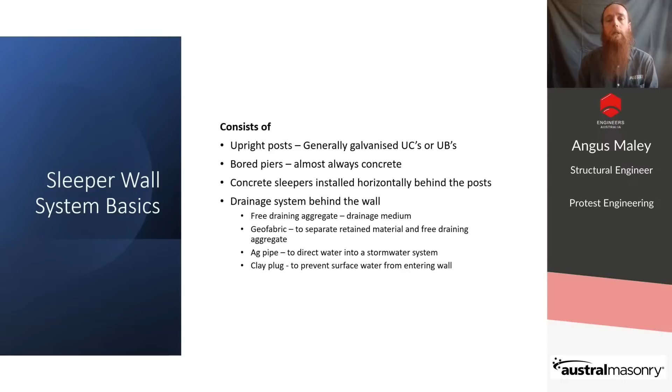Posts are generally installed at either 1.6 or 2 metre centres. Common post sizes used in the industry are 100 UC15, 150 UC23s, 150 UC30s, and 250 UB26s. Sleepers are generally 75 or 80mm thick and either 150 or 200mm in height. The system retains earth up to a height of around 3 metres quite efficiently. The system can be used to retain heights of a little over 4 metres, however expense and risk does go up.

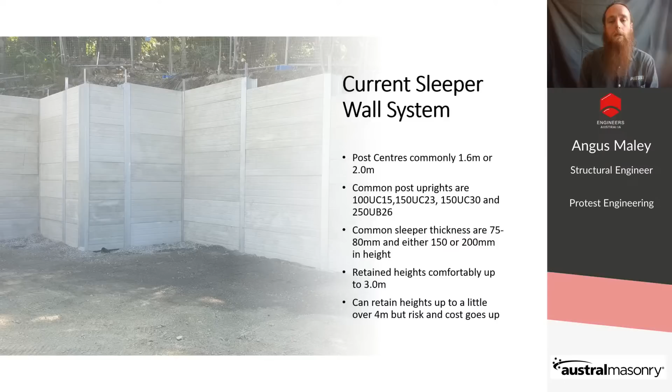I have been involved with construction of a sleeper wall up to a retained height of 6 metres in an industrial setting. However, the retained and founding material was extremely good and dead men were used to add additional resistance. Projects like that are not very common, and I would suggest the use of other wall types when retained heights in excess of 3.5 metres are required, unless there is some early contractor involvement at the conception of the project.

A basic history. Concrete sleeper walls gained traction in the civil sector in the 1990s, primarily in southeast Queensland, and started with precast concrete posts instead of the commonly used galvanised steel posts that are used today. These walls worked fine, however the concrete posts did create a larger footprint and also create some limitations to the system. I will elaborate more on these limitations later.

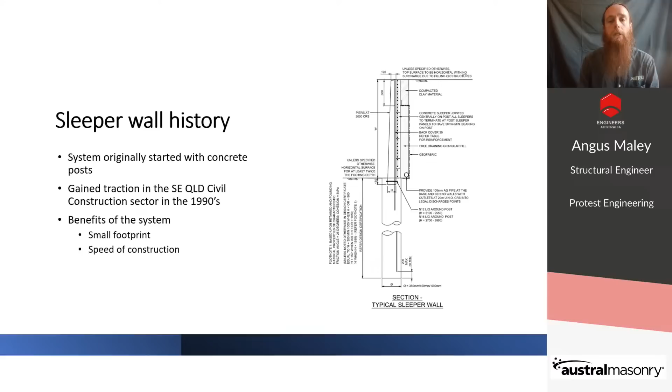The system gained popularity due to its small footprint, durability, and speed of installation. In the infancy of the system, these walls were primarily used to retain wall heights of up to 2 metres. The system works best when retaining and founding a stiff clay or better material, in cut, or if used in fill, where the embankment can be overfilled and cut back.

Advantages of concrete sleeper walls. Concrete sleeper walls have the smallest footprint out of all types of retaining walls, which is one of the driving factors as to why they have become so common in the civil and building industry. They are generally cost effective. Like most other retaining walls, as the retained heights increase, so do their costs. Boulder walls tend to be cheaper than sleeper walls, however more land is lost, so when space is at a premium, sleeper walls tend to be the preferred option.

Concrete sleeper walls are also a preferred choice due to their durability, especially when compared to a timber sleeper wall. A core fill blockwork wall, dry stack masonry wall, or even a boulder wall, however, will have greater design life provided they are maintained properly throughout their lifespan.

In terms of construction, they are much quicker when compared to a core fill blockwork wall. When compared to a dry stack masonry wall or a boulder wall, they are similar in terms of installation speed. They work best in either a cut environment or when a fill embankment can be overfilled and then cut back. This has made them popular with civil contractors as they can prepare the retaining wall work zones with their big machinery and then hand over to the sleeper wall contractor who completes the rest.

The speed of construction reduces the amount of time the cut embankment is left open, which reduces the risk of embankment failure and also means compaction is generally not required behind the wall. They are a low maintenance wall. Once they are installed, there isn't much to do in terms of maintenance, and due to the concrete face, there isn't anywhere for vermin to take up residence or spaces for weeds to grow out of the face, as is possible with crib walls or boulder walls.

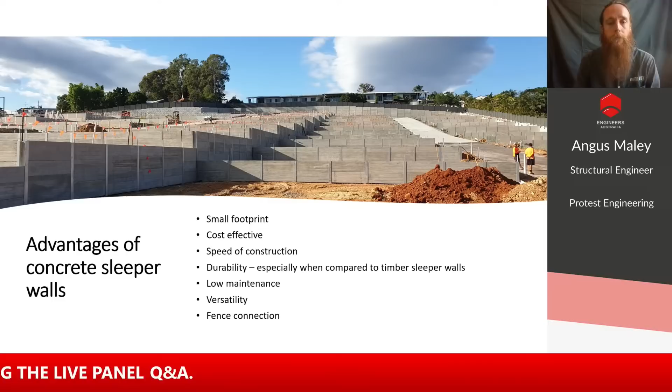Now that the system is using universal columns and beams as the upright posts, when there are higher loads above the wall due to either higher live loads or sloping grounds, it is just a matter of increasing the size of the UCs or UBs, increasing the bored pier diameter, decreasing the post spacing, and increasing the number or thickness of concrete sleepers. The ability to either bolt or have a fence connection welded onto the steel post is a huge advantage in terms of overall footprint and overall project cost.

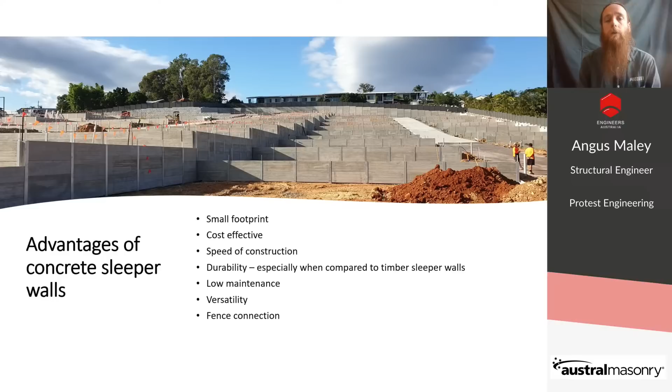The fence connection means the fencing contractor does not need to auger and install a fence footing. Before the fence connection came into the market, the options were fencing contractors would auger behind the finished wall, which ran the risk of compromising the geofabric that encapsulates the drainage aggregates, or void formers needing to be installed during the sleeper wall installation, which proved expensive and also relied on some degree of compaction around these void formers.

Cost savings. The sleeper wall market is extremely competitive, and there have been numerous attempts to reduce the cost of the overall delivery per square metre of wall. There are a few that have stuck and I believe work fine. There are also a number that, while still employed by certain designers and contractors, involve a degree of additional risk. All of the cost savings I will talk about involve some amount of additional risk to the end product delivered. I'm not saying these cost savings should not be used, however, the risk needs to be understood by all parties and managed accordingly.

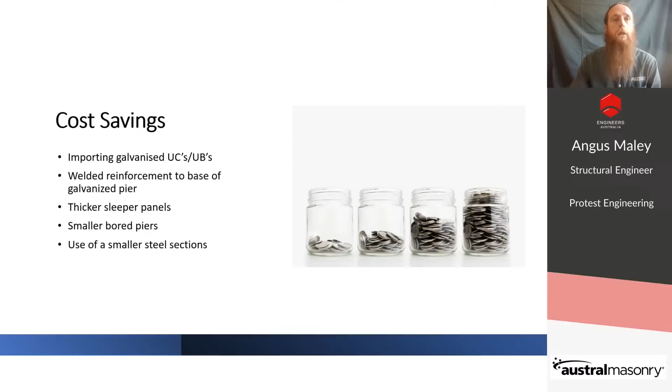The main cost savings are imported UCs or UBs, welded reinforcement to the base of the galvanised steel pier, thicker sleeper panels, smaller bored piers, or use of smaller steel sections. First on the cost saving list is importing of the galvanised steel UCs or UBs. Everyone in the market does this. The cost of the steel post represents a large proportion of the overall delivery cost, so you simply can't play in this market if you aren't importing steel posts.

Even if a concrete sleeper wall supplier was purchasing steel locally, a lot of this steel would have been imported anyway. Provided adequate QA has been conducted on the imported beams, this isn't an issue. Simply requesting mill and galvanising certificates from the importer is probably not enough. A rigorous QA system, including some third-party testing of beams after they have arrived in Australia on each delivery, should be occurring. I'm not confident this is happening industry-wide, however, this is based on my opinion only and can be taken however you want.

Welding of reinforcement to the base of UCs or UBs. This approach is commonly used by a lot of sleeper wall suppliers and installers. There are a handful of people in the industry who don't like this approach for various reasons. However, from my experience, I haven't had too many issues with walls designed and constructed this way. It is hard to estimate, but there must be well over 1 million square metres of wall installed with posts

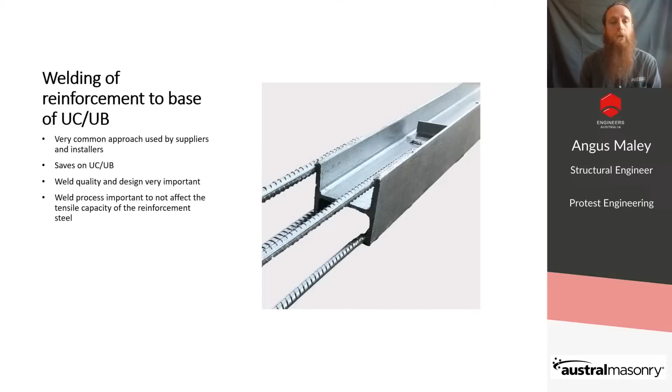using this base detail. Things to watch out for are the base connection design, the weld quality, and also the weld process. The welding process needs to ensure the bars aren't overheated. If this can't be controlled, the designer needs to design for reduced tensile capacity for the reinforcement.

Sleeper design. 75 or 80 millimetre thick sleepers are the common sleeper thicknesses provided by sleeper manufacturers. Cover varies from 25 to 30 millimetres and concrete strength varies from 40 to 50 MPa. All manufacturers cast their sleepers in steel forms and use intense compaction, so Table 4.10.3.3 in AS3600 can be used when calculating durability.

Any structural engineer familiar with concrete design will understand that these sleepers are extremely thin and also slender when spanning 2 metres. On paper, a sleeper that is 75 millimetres thick, cast with 40 MPa concrete and 2 N10s will actually have more capacity than the same sleeper cast with 2 N12s, because once N12s are used, it becomes over-reinforced and the code penalises the design.

In practice, the sleepers obviously aren't as strong. I believe this quirk in the code means there are certain manufacturers using this to provide a better sleeper design on paper, however one that will deflect more and is more susceptible to cracking. Another point to note is these sleepers are designed for where it will be installed long term.

The sleepers, however, need to be demolded after being cast, moved to the holding yard, loaded onto a truck via forklift, transported to site, unloaded on site, then moved around on site with either an excavator or skid steer before being lifted into the wall. Plenty of opportunity for them to crack.

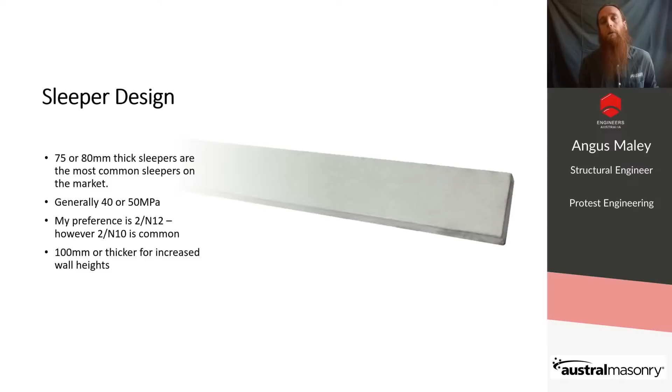When the wall gets to a certain height, around 1.6 to 1.8 metres high in a normal environment, a 75 or 80 mil thick sleeper, depending on concrete strength, reinforcement used and site conditions, starts to fail at the base of the wall. One option is to double up the sleepers at the base of the wall. Manufacturers are now offering thicker sleepers to handle the additional loading on higher walls or walls with additional loading. Obviously, installing 1 by 100 mil thick sleeper is a lot cheaper than installing 2 by 75 or 80 mil thick sleepers.

Bored pier diameters. In terms of design, the designer gets much more bang for their buck by using deeper piers than larger diameter piers. Concrete volume is a squared function of the diameter of the bored pier. Concrete and the bored piers represent a large percentage of the overall installation cost of the sleeper wall system, so anything that can be done to reduce the cost of the concrete is worth investigating.

The issue with reducing bored pier diameters is twofold: reduced capacity of the bored pier and also construction tolerances. Just because something fits on paper does not mean it will work in the field. I've project managed countless projects using a 100 UC15 installed in a 350mm bored pier. They work and they do save money. They certainly are not preferred by the install crew.

On paper, it would seem there is enough room for the pier. However, if you break down the steps from set out to pier install, it isn't hard for the holes to creep 50mm or more despite good practice. Firstly, the holes are set out with 1 or 2 people with a tape measure. I've never seen a level used when this occurs, so the tape measure may be on a slight grade, introducing the first potential for set out creep. The hole is then marked with line marking paint, which represents another 30 to 40mm of potential error.

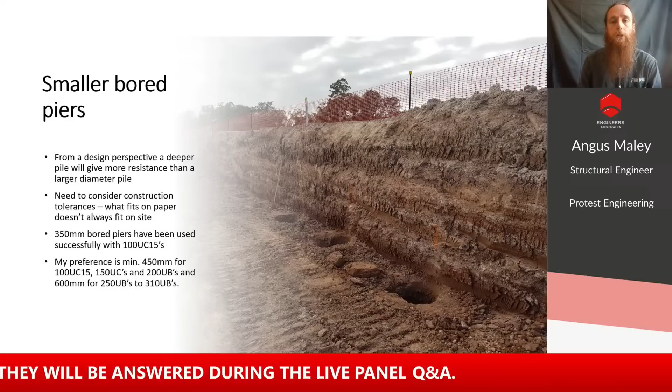The process of a machine operator augering the hole, even if spotted, isn't the same as a hole being drilled in timber or steel that has been hole punched to center the drill. There will be a deviation of the bored pier compared to what was set out, no matter how good the person who sets the wall out and how good the operator is.

My preference is to use a minimum of a 450mm bored pier for post sizes of 100 UC15, the 150 UC series and 200 UB series. Once the steel posts get to 250 UB or 310 UB series, the bored piers should be increased to a 600mm diameter. As stated above, a 350mm bored pier can work.

However, this does introduce risks into the execution of these walls, and it is really up to the designer and installation company about how this risk is dealt with. I've heard of companies using 300mm diameter bored piers with 150 UCs in a foundation that consisted of rock.

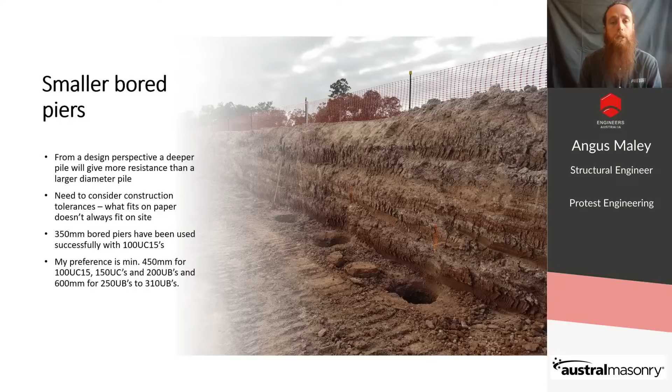Speaking to the head contractor at the time, this didn't end well. 150 UB14s. A 150 UB14 weighs slightly less than the 100 UC15, but has a better moment capacity. What it makes up for in terms of moment capacity, it loses in flange width. A 100 UC15 only has a flange width of 99 mm.

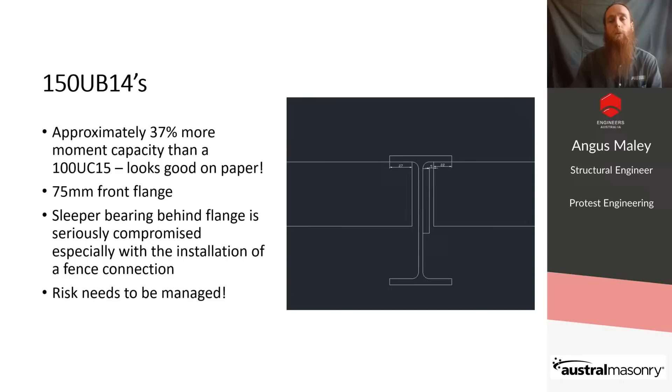I won't design a wall using a 150 UB14. However, I must note I have inspected walls that have been constructed using these posts, and the install teams have done an amazing job to get good bearing of the sleepers onto these posts. If you choose to design or install walls using these posts, you need to be aware of these risks and manage them accordingly.

Risk and mitigation. Concrete sleeper walls, to the casual observer, are just an extension of a timber sleeper wall they have commonly seen. As such, they should be fairly easy to design and construct, and the fact that the contractors are now using steel posts and concrete sleepers should make them almost foolproof, right? Unfortunately, this is not the case. In terms of design, they aren't so straightforward.

Earth loads onto the above ground structure, e.g. the sleeper and steel posts, are fairly straightforward to calculate using fundamental soil mechanics. The issue with soil mechanics, though, is that if you had 12 geotechnical engineers in a room and asked them a question, you'd probably get 13 different responses.

The main difference with regards to loads onto the concrete sleeper walls comes down to the use of C' or drained cohesion. The consensus is to use a C' of 0 in the retained material and use a small amount, if any, in the foundation material. My advice to any designer is to tread very carefully if you choose to use C' in your design.

In terms of resisting the earth pressures, the system's restoring force is a laterally loaded bored pier. Common design methods for the design of the bored piers are Broms, Brinch Hansen, or the equilibrium method, to name a few.

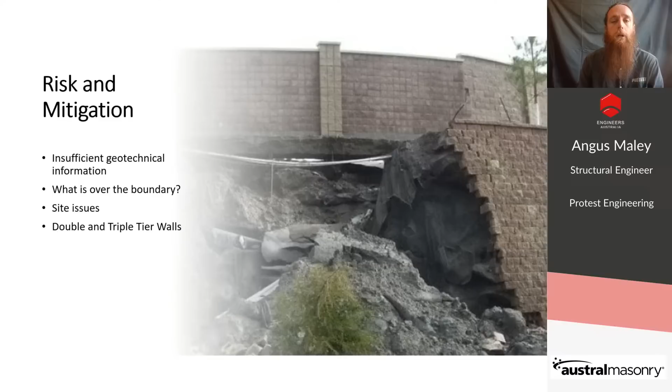While all walls need to be designed with some sort of geotechnical input, the higher the wall gets, the more important this is. As a designer, this can be one of the hardest things to get. Quite often, after I've been engaged to design a sleeper wall and I request a geotechnical report that has been conducted on the site, I'll be lucky if I receive one. Sometimes I receive a clear and concise report that contains the information I require. This, however, does not always happen.

The geotechnical report may be an acid sulfate investigation or perhaps a bedrock investigation. From the client's perspective, they have ticked the box and provided me everything I need to complete the design for the 2 to 3 metre or potentially even higher sleeper wall they need designed. So what's the problem? These reports quite often do not give enough information for the designer to complete their design.

2 boreholes are required in every house lot to enable the structural engineer to design the foundation of someone's house, yet the industry seems to think it is acceptable for retaining walls to be designed with limited investigation and substandard reporting. To be clear, what I describe as substandard reporting is not necessarily a dig at the geotechnical company that has been engaged to provide the report.

If they have been commissioned to conduct an investigation into, say, the presence of acid sulfate affected soils, and the report has addressed that, then they have completed their brief. The fundamental issue is that they have not been given a good brief of what is required on the project. The geotechnical consultant does their job, the client thinks they have a geotechnical report, and now wonders why the retaining wall designer wants more.

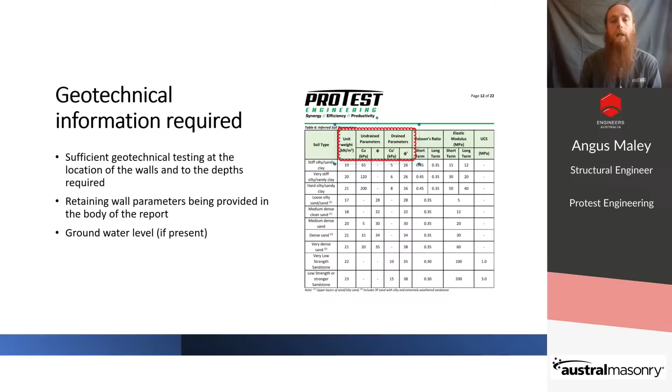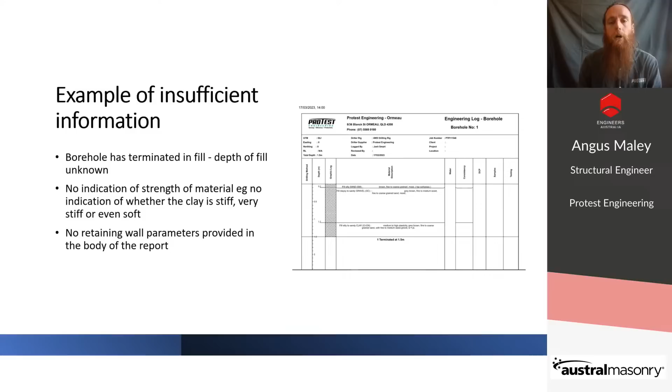Here is an example of a borehole that does not contain sufficient information. The borehole has terminated in the fill, so we don't know the depth to natural. There is no indication of strength of the material. Is the clay soft, firm, stiff? We don't know. There are no DCPs provided, and for this example, the report does not contain any guidance on what retaining wall parameters to use. When information is presented like this, it is very hard to design a retaining wall.

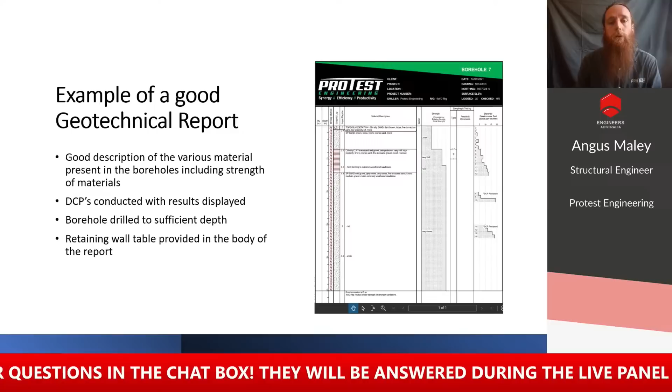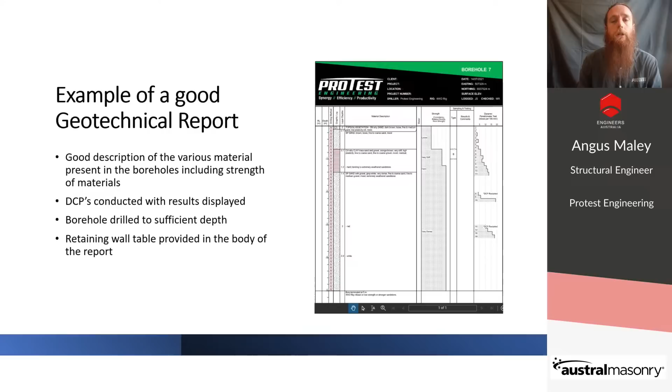Example of a good geotechnical report. This borehole has good descriptions of the various materials present in the borehole, including the strength of each material. DCPs have been conducted. The borehole has been drilled to sufficient depth, and the retaining wall design parameters were provided in the body of the report. This is the sort of information that should be provided to a retaining wall designer to enable them to complete their design.

What is happening over the boundary? Sleeper walls, or any retaining walls for that matter, when designed into a project, are quite often on the boundary of the site. What is happening on the other side of the boundary is quite often not defined on the drawings prepared by the civil designers. Some civil designers do, and I take my hat off to them. However, on the whole, it seems the project inside the boundaries of the site is what matters most. Obviously, this is not the case if you are tasked to design said retaining walls.

Nearmap is pretty handy, however, nothing compares to going to site and walking the boundary. I highly recommend everyone who is designing retaining walls to visit the site on their project and check out the site as well as what is happening over the boundary. If there are pools, existing retaining walls, structures, or batter slopes that aren't shown on the drawings, then you need to design accordingly. If you design the odd retaining wall here and there, you may be able to get away without visiting the site and never have any issues. It's all a numbers game.

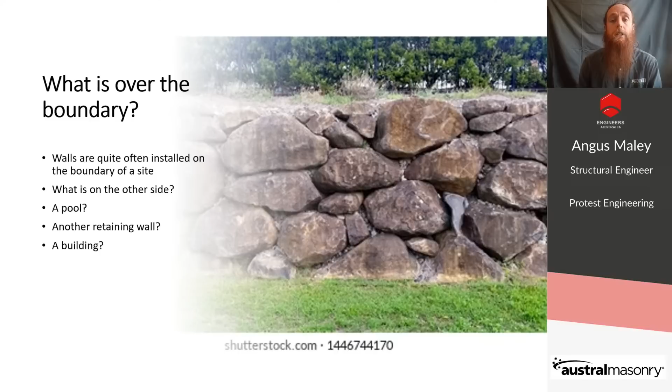If you design multiple retaining walls, at some point in time, there will be something on the other side of the boundary that you didn't design for. I would not rely on the contractor involved to pick this up for you. If you are the engineer conducting the inspections to provide the construction certificate and you only pick this up during construction, this is not a position you want to find yourself in. Alternatively, if you are only providing the design and someone else is completing the on-site inspections, you run the risk of them not picking this up.

Site issues. Sleeper walls on a civil site are exposed to various risks throughout the civil construction phase. The civil contractor who has possession of the site and is responsible for the erosion and sediment controls on the site does not always consider the concrete sleeper walls on the job. Every now and again, a contractor will inadvertently direct the site's water towards a sleeper wall that is under construction. Generally, the highest loading from water will occur during the civil construction stage due to the fact that there are no structures with roof water systems connected. Normally, this is fine.

If, however, a torrent of water is directed to the rear of a sleeper wall, it generally isn't going to handle this very well. While this is hard to manage from a wall designer's or installer's point of view, it is worth looking out for. Overloading by plant behind the wall is also another risk that is hard to manage when you aren't in control of the plant behind your wall.

The risk, however, is quite real, and it's one of the leading causes of issues with sleeper walls during the civil construction phase. Sleeper walls located on boundaries where the site needs to be filled represents one of the largest site risks for this type of wall. As mentioned before, these walls are best suited for overfilling an embankment and then cutting it back before installing the wall. This process ensures good compaction of the retained material.

The problem with large walls on boundaries is this quite often is not possible. If there are existing houses on the lower property, the contractor may not be able to fill and compact more than 1/2 metre or so before cutting back for the sleeper wall. The issue then becomes filling and compacting the site material after the wall is installed. It is very easy to install the wall and place the fill without compacting it. However, this will result in much larger forces on the retaining wall and long-term settlement issues.

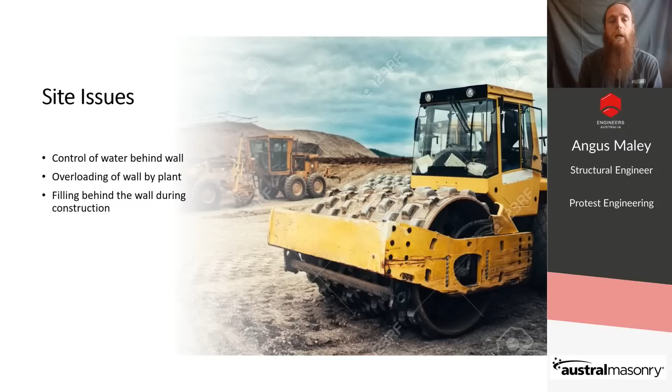Compacting behind the wall needs to be completed with handheld equipment and closely monitored to make sure the material is compacted adequately, as well as the wall not being overloaded. Design considerations. If groundwater is present, this needs to be designed for. While groundwater is a design issue, it is also an issue for the installation team. In sands, this proves extremely difficult. If groundwater is present and the foundations are sand, alternative walls should be considered.

Slopes above or in front of walls: when these are present, a global stability assessment is recommended. Deflection of steel posts should be checked by the wall designer. This is especially important for higher sleeper walls. Tiered walls are quite common due to councils having height limits for a single lift retaining wall. The design approach seems to have changed over time, with the consensus being to design the rear wall with much deeper footings. I've seen designs where the front wall has been designed to handle the loading of the upper terrace wall. Fundamentally, this seems okay.

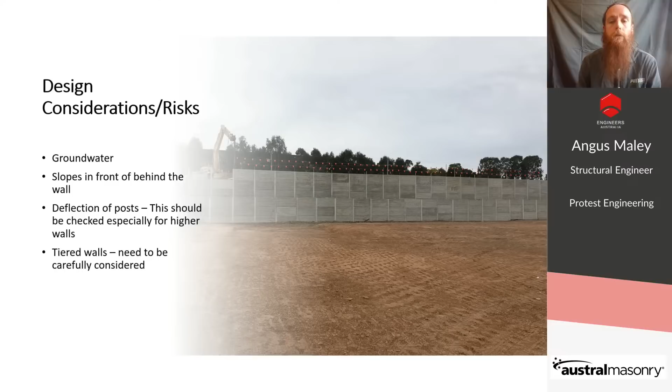However, in order to transfer the loading onto the bottom wall, a no-fines concrete backfill for the front wall is required. Whatever design approach the designer chooses, the interaction between the front and rear wall needs to be carefully considered. This concludes my presentation.